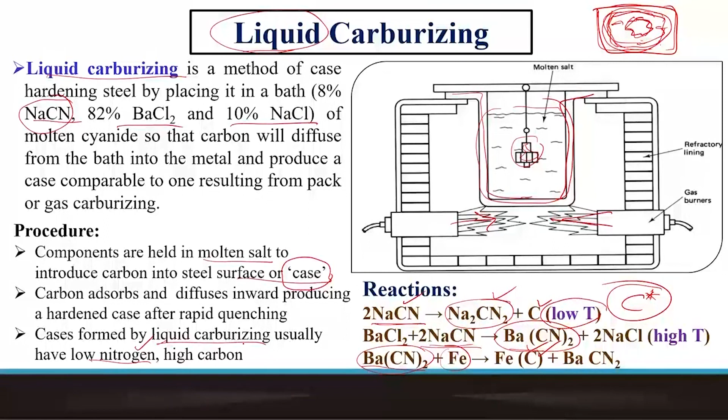So the point of distinction here is the liquid state, the charge that we are dealing with, and the temperature at which we do this. One very important point, absolutely not to be missed, is that we have a lid which has to be completely hermetically sealed so that there's no escape of sodium cyanide vapor, and even inhalation of that vapor can lead to disaster - instant death.

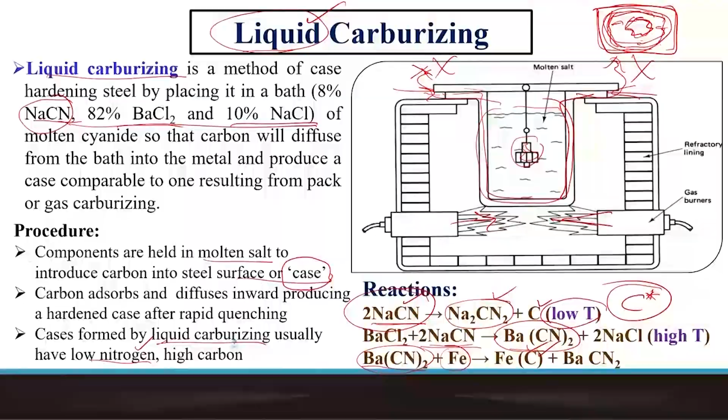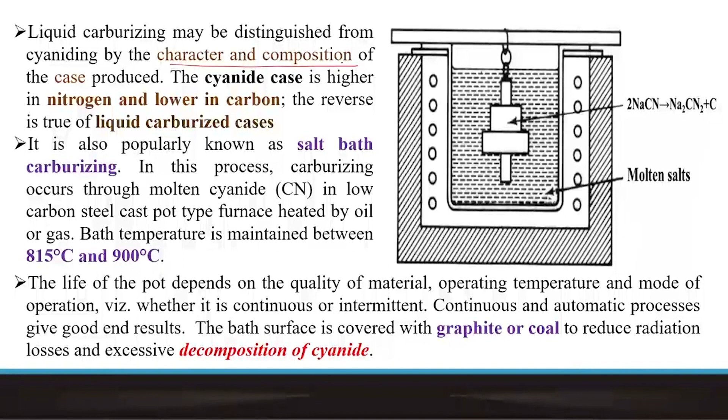So this is to be distinguished from the other carburizing processes in terms of the character and composition of the case that we produce. The cyanide case is higher in nitrogen and lower in carbon, and the reverse is true when we are dealing with the liquid bath process.

So it's essentially a salt bath, and the temperature we are talking about is slightly lower than the pack carburizing treatment, typically about 800 to 900 degrees centigrade.

As I already mentioned, since we are not dealing with charcoal or coal or coke as the primary charge, but with cyanide, excess decomposition of cyanide is to be prevented and should not lead to any kind of human or other casualty. So this is the core reaction: the cyanide we use goes to cyanamide and then releases carbon, and this carbon gets absorbed into the component.

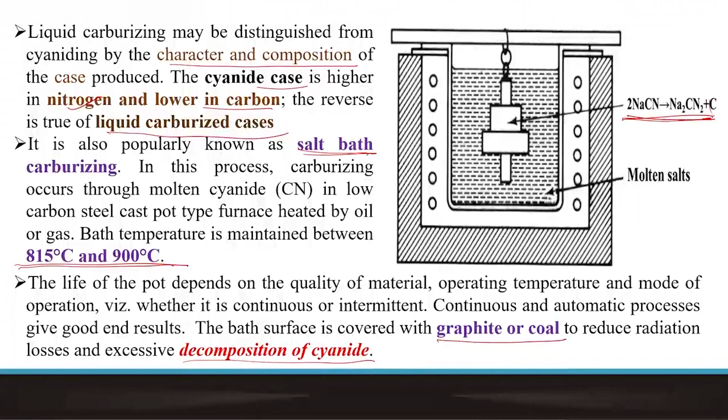Again, this is the temperature difference when we are going to the next strategy of carburizing, which is gas carburizing. So let's remember that pack carburizing is solid state, cyanide bath is liquid state, and in the gaseous state we are dealing with a slightly different charge, primarily methane as the primary source of carbon.

Here is the overall reaction, but release of carbon doesn't happen directly from methane. It goes through a certain decomposition process, but the overall reaction would look somewhat like this. It is this carbon which comes out in nascent form and gets adsorbed, diffused and dissolved at the surface. This component is suspended in a gaseous environment, and here again we have a sealed furnace because we are dealing with methane, and release of methane to the atmosphere is not as dangerous as cyanide, but nevertheless we want to retain certain concentration or potential of carbon enrichment inside the chamber.

So this charge is suspended from the top and the lid is closed. We charge methane and methane-hydrogen or a certain mixture, and then we heat. These are the heating coils, resistance heating coils, and we go up to a temperature of about 870 to 950, slightly higher than the cyanide bath temperature, and then we carry out the operation for a certain period of time.

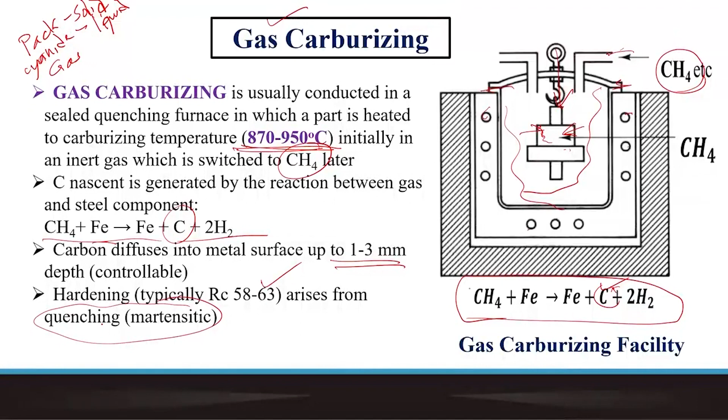Just like in the case of liquid bath or cyanide bath treatment, here we are dealing with a higher hydrocarbon, propane, and then we allow this to be dissociated. During this dissociation process, methane forms. Along with that, we also have carbon released, nascent carbon released, and that carbon gets adsorbed to the surface. We could also have a parallel reaction where methane reacts with carbon dioxide, forms carbon monoxide, and carbon monoxide in contact with the iron or steel charge allows dissociation, release of carbon from carbon monoxide and carbon dioxide.

So these gaseous byproducts escape, and they are not of much consequence. But since there is hydrogen evolution, we have to use a closed lid, closed chamber, and also have the possibility of burning out the gas discharge from this reaction chamber. So carbon gets adsorbed to the surface, and that's how we have carbon enrichment or case formation.

We can also have a parallel reaction of formation of carbon dioxide leading to formation of carbon monoxide, and in turn carbon dioxide can release carbon by way of this kind of reaction. So the case depth or carbon enrichment from the surface - this is the surface, and this is how we are going below the surface. This is the component, and this is how carbon is diffusing in and creating a case on all sides with a certain depth.

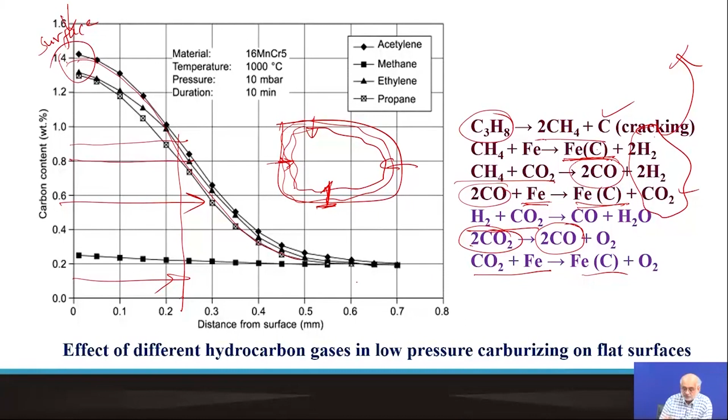This is typically for low alloy steel. Here the temperature is slightly higher. We are talking about maintaining a certain pressure, but the time required is very small compared to the 10 hours, 20 hours of pack carburizing - maybe a few hours, or at least close to an hour or two, for liquid carburizing. And here in gas carburizing, it's much smaller.

We can have one of these charges, and what we see is that in the case of acetylene, which actually decomposes faster, being a lower hydrocarbon, the carbon enrichment at the same depth is always higher. Methane, if we use only methane, is a very stable hydrocarbon - it doesn't dissociate, so it doesn't make much difference. So one has to use essentially these unsaturated hydrocarbons, which will be able to release carbon during the dissociation process, and that carbon can get adsorbed onto the surface.

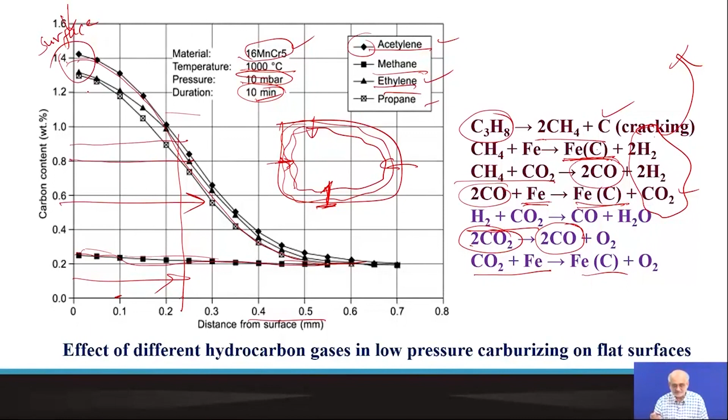We actually have a finer form of gas carburizing, which is called vacuum carburizing. Essentially, this is the finest process because in all other processes, which are done in air, you have always a certain amount of concentration of oxygen present in the atmosphere. And that oxygen - we all know that iron is very hungry for oxygen.

Because it is likely to form one of these oxides, which contributes to the so-called scale formation, and this is detrimental. We don't want this, because once you have a scale formed onto the surface of steel, diffusion of carbon becomes practically impossible, because now you have an impervious barrier layer of oxide that doesn't allow carbon diffusion inside.

Also, presence of oxygen will create another disadvantageous condition, whereby carbon from the bulk can try to diffuse out, react with oxygen, and form carbon dioxide or carbon monoxide. That means instead of carburizing, you end up doing decarburization.

So in order to avoid all this, one of the most ensured processes would be to first evacuate to a reasonable vacuum, 10 to the minus 3 to minus 5 millibar pressure, and then backfill with carbon-containing gases, say unsaturated hydrocarbons, which will eventually dissociate and give methane, releasing carbon. That carbon gets adsorbed to the surface, and that surface is now case hardened.

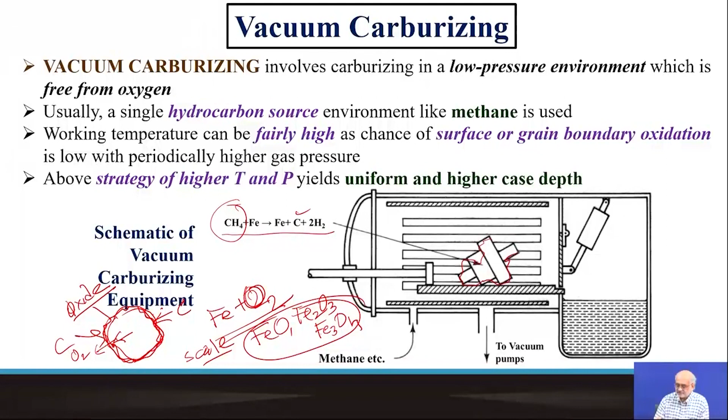So when we compare, we have already discussed the three possible approaches: the solid, the gaseous, and the liquid bath processes, and the final one is the vacuum process, which is LPG based. So as we see, certain comparisons tell us what's going on.

In all cases, the mechanism involves diffusion of carbon. In case of liquid bath or cyanide bath processes, we possibly may end up getting some dissociation of nitrogen as well, so we end up creating a carbonitrided layer. But in all other cases, essentially it's diffusion of carbon.

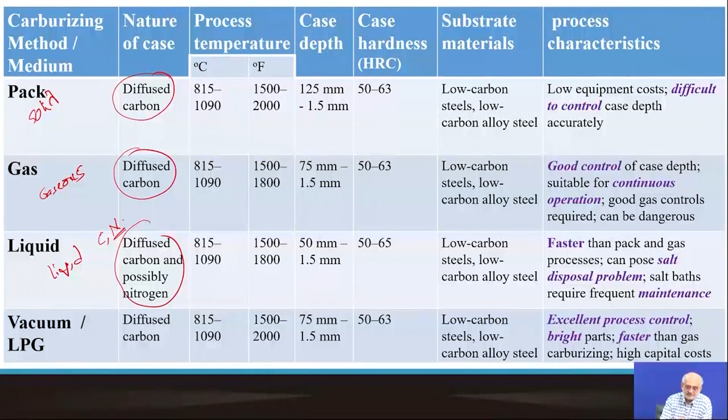There's a slight variation in temperature as we go to gas carburizing or other methods—somewhat higher temperature used—but the depth we are talking about will be higher in case of pack carburizing or solid carburizing, because you have very little control over it.

Once you charge and heat, carbon diffusion cannot be stopped by pressing a button. You have to take the box out, cool in air, then break it open and remove the charge. During this process there is residual temperature, and as it's higher than room temperature, diffusion of carbon continues. The temperature decreases, but not to room temperature instantly, so diffusion continues.

As a result, you have slightly higher case depth in pack carburizing, lower in gas carburizing, and the lowest in cyanide bath or liquid bath carburizing. In vacuum carburizing, you can achieve this with a much smaller time period. The case hardness range will be somewhat similar, depending on the time-temperature combination and carbon potential used.

The substrates are very similar in all cases—either carbon steel, plain carbon steel, low alloy steels, or even high alloy steels, and so on.

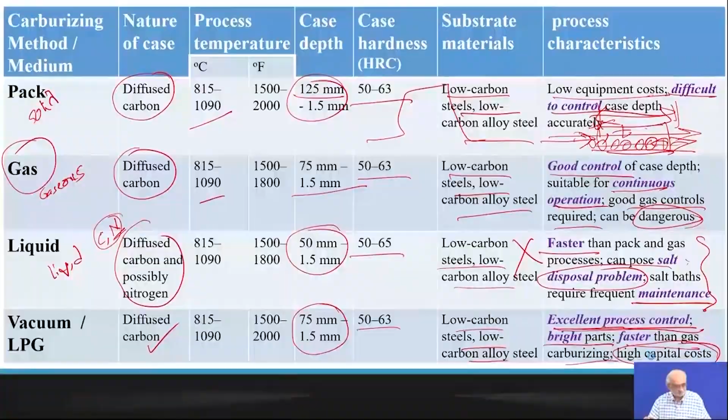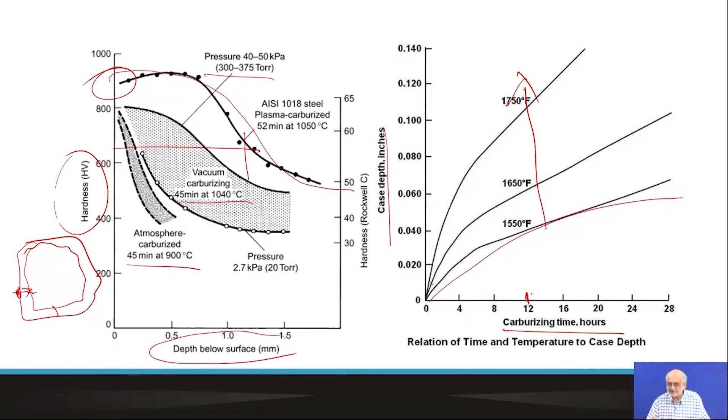Typically, this is how the hardness varies with depth, we have already seen, and this is how again the depth actually varies with time.

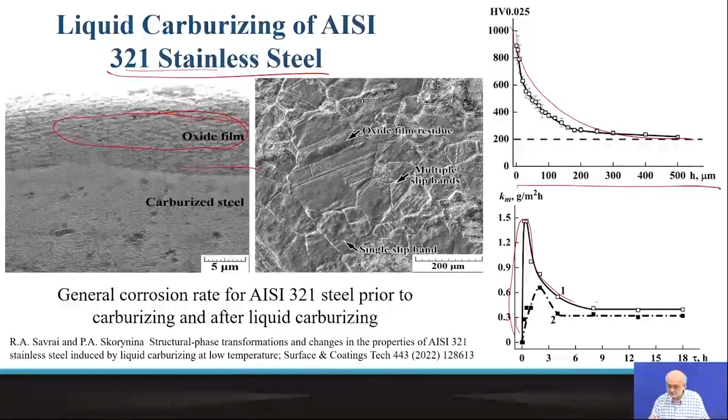Now, we have to spend a few minutes here to understand the implications of all these, starting from pack carburizing to liquid bath carburizing to gas carburizing and even vacuum carburizing. In all these cases, what is it that we are trying to do?

First thing is that we are starting with a material which is low in carbon, 0.2% or less. So mild steel, lower strength, higher ductility. Most important thing, it has higher toughness, so it can absorb energy. Be it for a rotating part or something undergoing reciprocating motion, if there is a change in stress cycle, or sudden application of high load, then it should be able to withstand that amount of mechanical stress.

So we require a core, and at least 90% of the component is soft. Initially we are starting with the entire 0.2% carbon steel, mild steel or low carbon, low alloy steel, and the composition is the same all throughout. Then we are just going to enrich only about 5 to 10% of the surface area with carbon and leave the remaining 90-95% unaffected, same composition. So the core, which is 90 to 95%, retains this low carbon region, whereas the surface or the case gets enriched to about 0.8, 0.9 or 1% carbon.

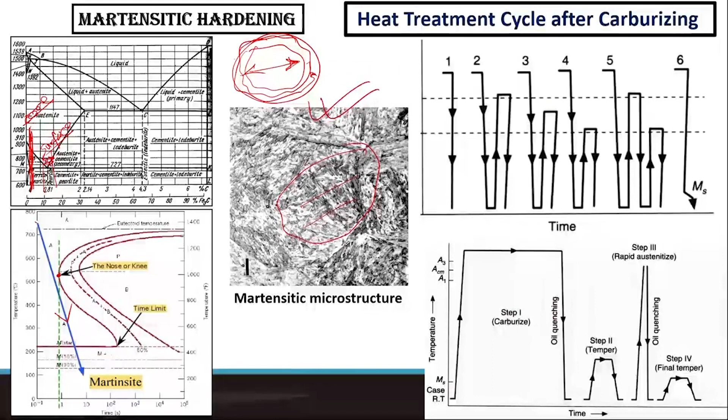And once we do that, we end up with this martensitic aggregate. And this martensitic aggregate, please remember, not only has martensite, but may also retain some retained austenite. The lower the amount, the better it is. But 100% martensite is practically impossible because of variation of depth and the corresponding cooling rate variation. So typically we can go through various kinds of carburizing cycles, which essentially is to expose to high temperature above AC3 primarily.

In solid state, with liquid, in contact with a liquid bath or molten salt bath, or in contact with a gaseous environment, or gaseous environment backfilled after creation of vacuum. In all these cases, the surface is exposed to a highly carbon enriched environment, and that's where carbon comes in. That process requires diffusion, and that's why we have to maintain high temperature.

We necessarily have to go to the austenitic region, because austenite has the highest carbon dissolution or absorption capacity. Carbon solubility is about 2.11% when it is in the austenite region, compared to ferrite which has only 0.025% or less. So it's for these two reasons: one, the carbon diffusion rate is higher at high temperature, so we have to go to the austenitic region; and two, the capacity to dissolve carbon is much higher in the austenitic region.

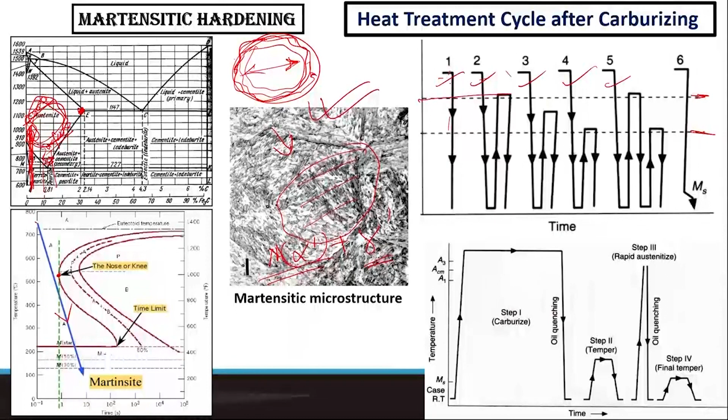Then I again have to reheat the surface and then quench. But if I do that, it's going to create a situation where I'm subjecting the component to higher thermal shock, and also possibly something I don't need, because the core is at lower carbon content. For 0.2%, if you want to go to austenite and quench, you may end up getting martensite, but that martensite will have very low carbon content and is inadequate to give any wear resistance. And that's not desired either.

That's not our target. So I would rather go for one of these treatments where, for example, I first heat the entire block, and then cool in air, so that I do this kind of normalizing treatment. I create a grain refined core, and then I do another heating, not above AC3 but just above AC1, and then quench.

This is because the surface doesn't need this higher temperature. Even just above AC1 is sufficient, and when I heat above AC1, I'm already in the austenitic region. Now when I quench fast like this, I can convert that austenite to martensite. So a combination of this cycle is good enough for converting the surface to martensite and also ensuring a normalized or fine-grained structure of the core.

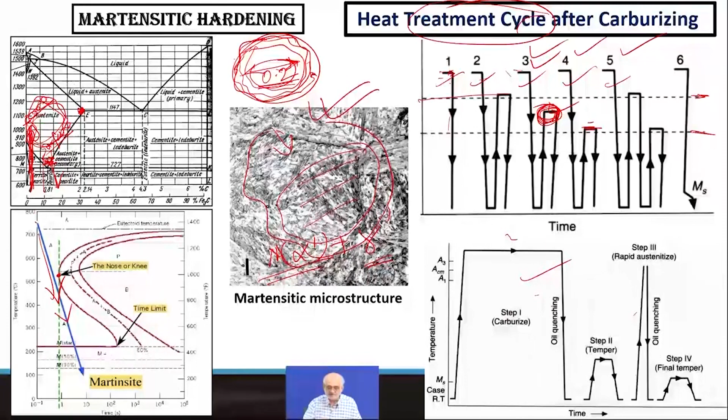This is how we can ensure a typical predominantly martensitic surface or case region. So we have to ask ourselves some questions: the differences in terms of solid, molten bath, or gaseous state processes. What are the hazards involved? What are the precautions required? What are the process parameters? How is vacuum carburizing different from solid and liquid state carburizing?

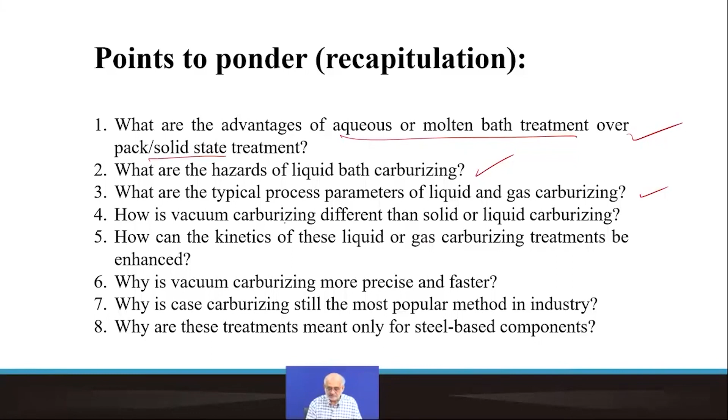How can we increase the kinetics, either by increasing the temperature, more time, or higher carbon potential? Why is vacuum carburizing more precise and faster? Because we have better process control. This is still a very popular case carburizing method because it's age-old, well understood, and requires very ordinary skill sets.

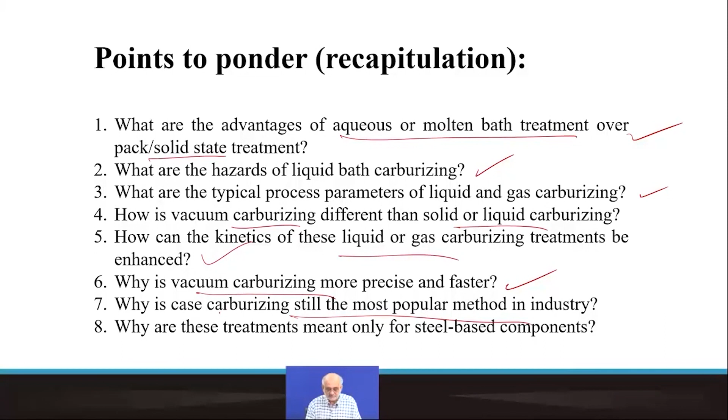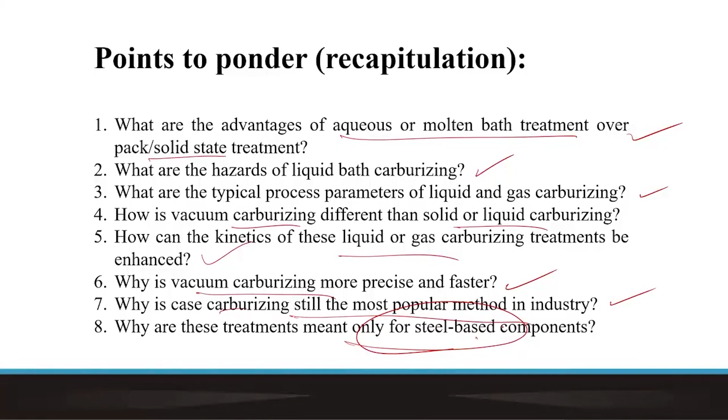And it is only applicable to steel, because the martensite we are talking about is tetragonal martensite, which can only form from carbon enriched, or carbon dissolved, solid solution in iron. That means we have to go to the austenitic range and then quench fast so that we can convert the austenite to martensite. So this is typically possible in carbon steel, and not just alloy steel with no carbon in it, and certainly not applicable to non-ferrous metals.